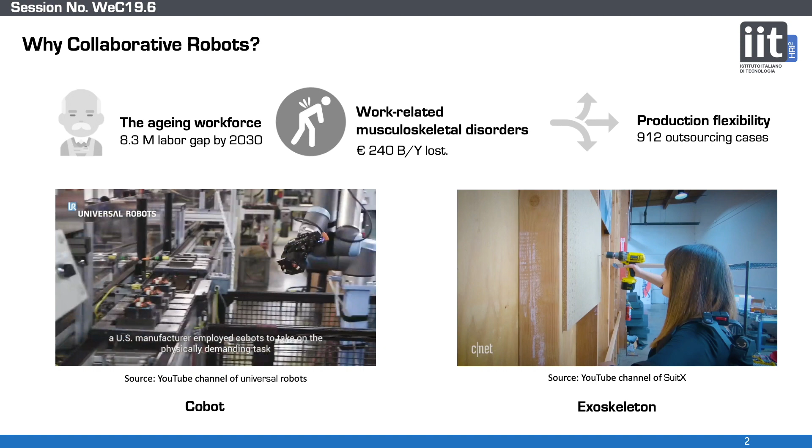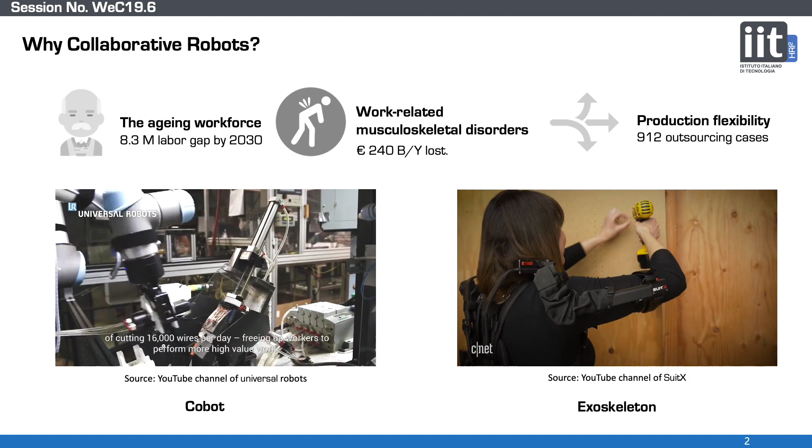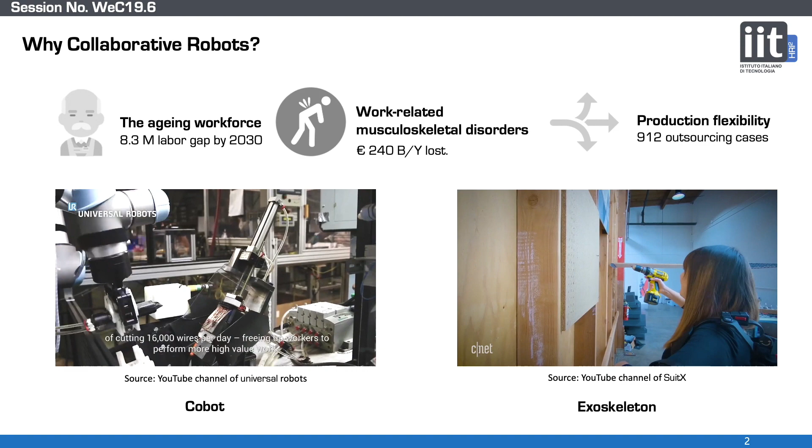Before moving ahead to the main topics, the question is why collaborative robots are important in industry. There are several reasons. First, the working forces in industry are getting aged. Second, companies lose a huge amount of money due to work-related musculoskeletal disorders. Third, production lines demand more flexibility. To address these issues, cobots and exoskeletons are examples of collaborative robots successfully introduced and integrated to take on physically demanding tasks instead of human workers, such as repetitive tasks or load carrying tasks.

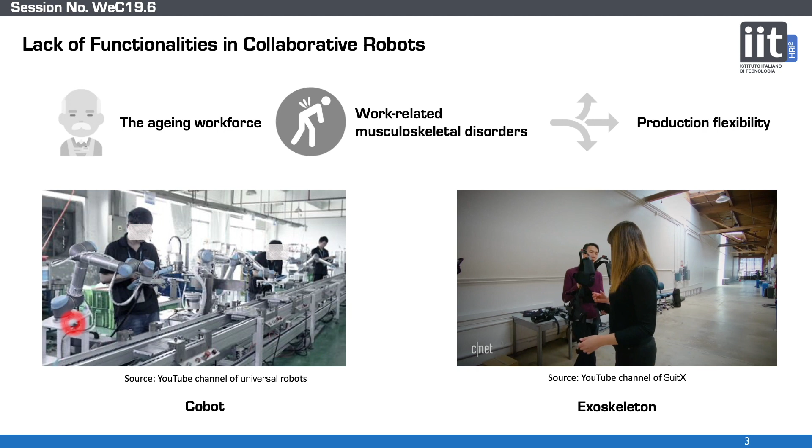Such technology is able to mitigate the workloads of workers. Although the effectiveness of collaborative robots is obvious in helping humans in industry, there still lacks the functionality to move towards future industry in flexible and reconfigurable aspects. Regarding cobots, they are still mostly used on fixed platforms and take on mostly repeated tasks similar to old industrial robots, which means it is hard to adapt them into flexible working environments. On the other hand, the exoskeleton can cause another burden to the wearers when changing their configuration due to the wearing of the equipment, causing fatigue.

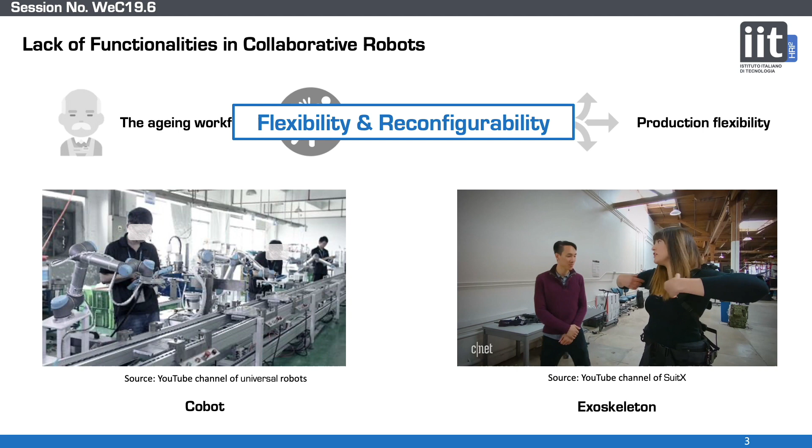To address these issues, we propose a new collaborative framework, a unified system that can be configured quickly between cobots and supernumerary limbs, able to cover a large range of industrial task requirements. This leads to reduced equipment waiting and setup time through exploiting the concept of modularity.

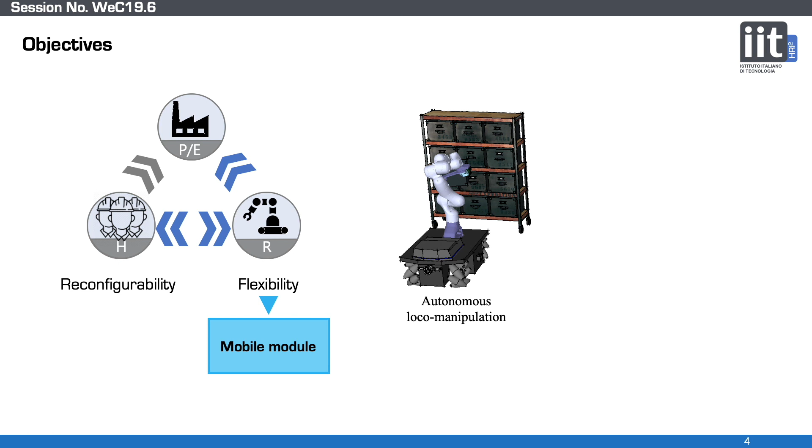To present this topic, the first consideration is flexibility. It can be represented by the mobile module that is able to work in autonomous loco-manipulation. We have developed such a system called MOCA, the Mobile Collaborative Robot Assistant.

The second consideration is reconfigurability. We consider a simple human-robot interface module that will be integrated into such a mobile manipulator. Then it turns into a human-integrated platform to perform joint actions, working like an exoskeleton.

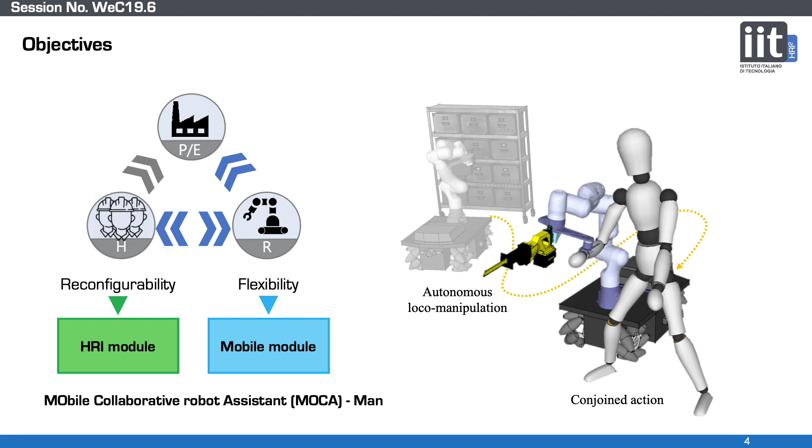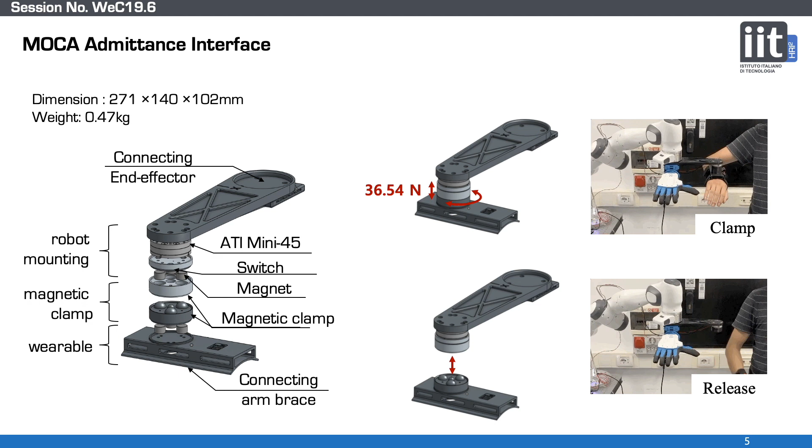When clamped, human intention or interaction forces are transmitted to the robot end effector for use in conjoined action control. In the opposite case, the conjoined action is terminated automatically.

The overall control framework is composed like this. There are two main modes: autonomous and conjoined mode, the latter working like a supernumerary limb. These are distinguished by the switch sensor from the admittance interface, whether it's clamped or not.

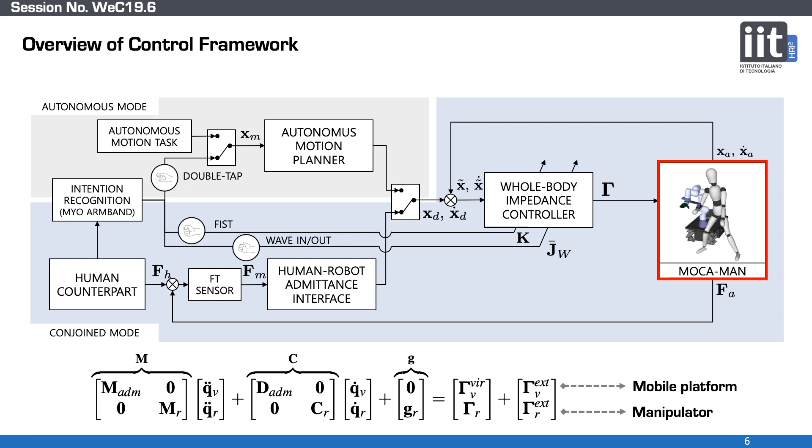To control the MOCA under torque-based control, we construct a whole body dynamic model that includes the mobile platform and the manipulator. As mentioned earlier, the MOCA has been developed for agile mobility. It is composed of the Robotnik mobile platform, with the Franka arm and Pisa/IIT SoftHand end effector placed on top for grasping purposes.

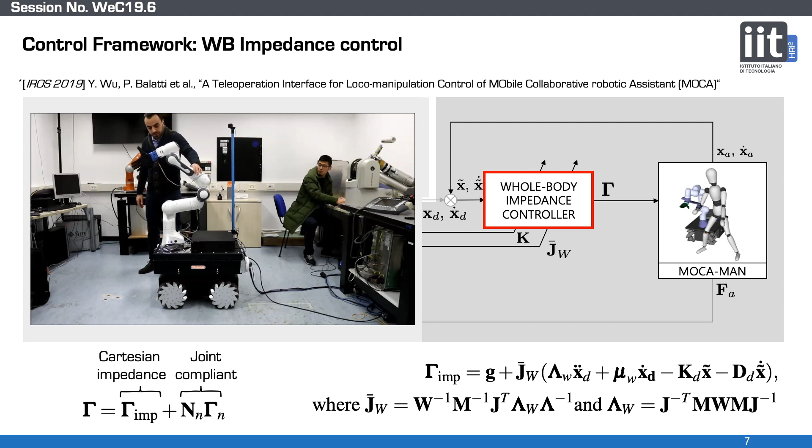The whole body motion is controlled through the whole body impedance controller as well as joint compliant control in the projected null space. The desired impedance parameters, compliance, and damping in Cartesian space can be regulated based on the targeted task. For more details, you can find the related paper presented at IROS 2019.

Moreover, we extended this whole body impedance control idea with the weighted Jacobian method. Thanks to this method, we are able to handle prioritized motions either in the mobile platform or the manipulator while controlling the whole body motion.

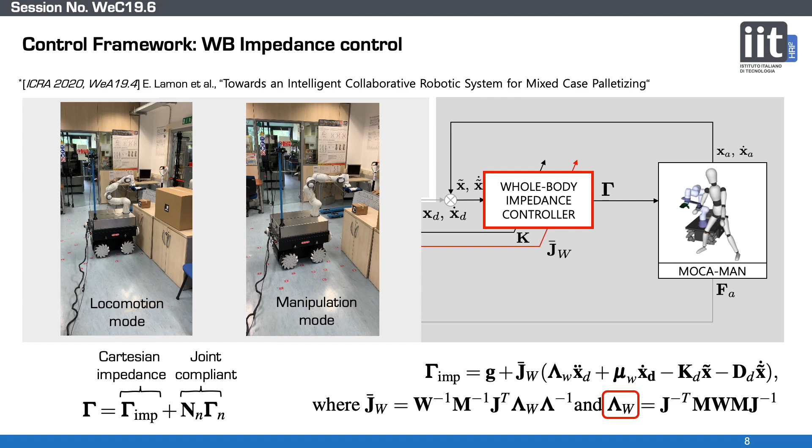This video shows that when higher weights are used in locomotion, most of the actions are exploited in the mobile platform than the manipulator. In the same targeted control, on the other hand, when the weight is on the manipulator side, the manipulator has more prioritized actions than the mobile platform to reach the same target. This work will also be presented in another session by colleagues.

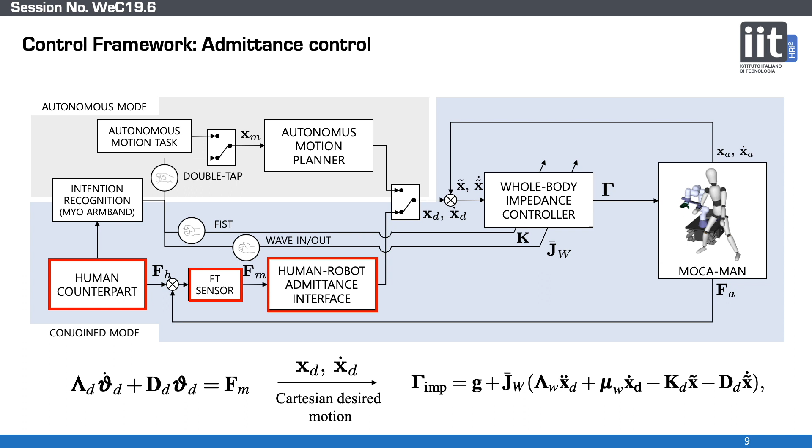When the admittance interface is clamped, the human intends to work with the MOCA, so the conjoined mode is activated. The target admittance action is to minimize interaction forces to follow the human's motion. The admittance controller generates the desired motion as input to the whole body impedance controller, using the measured force from the force torque sensor at the admittance interface.

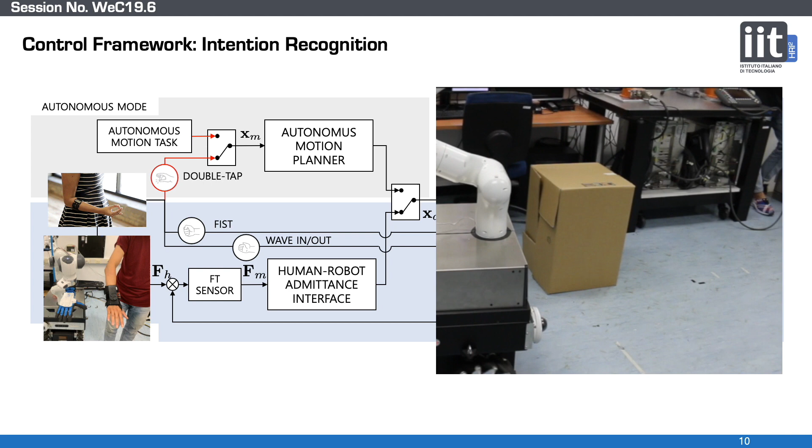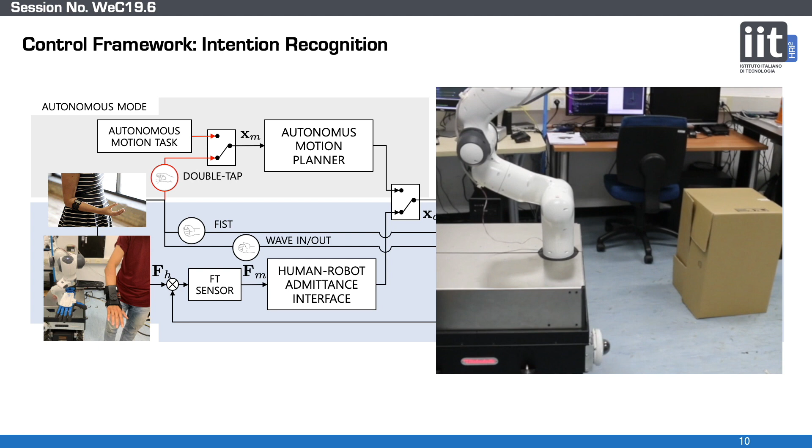To switch the mode and adjust the control parameters, the framework includes human gesture detection techniques through the Myo armband. Before clamping the interface, the double tap gesture will call the MOCA. The MOCA will approach you at the targeted position, with motion controlled based on the autonomous mode planner, including self-navigation. The fist gesture is engaged with the soft hand control to grasp or release the object.

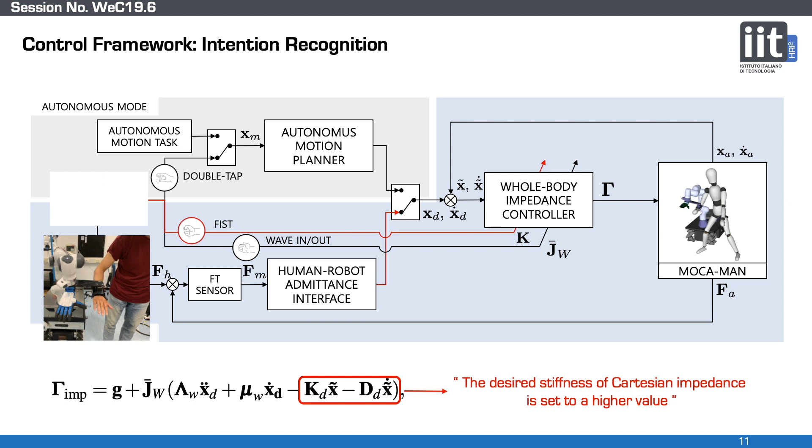When the soft hand is closed, it's pretending that an external object is being held, so the stiffness parameters of the impedance controller are automatically set to a higher value. Then the MOCA is able to compensate the weight or the external forces at the end effector.

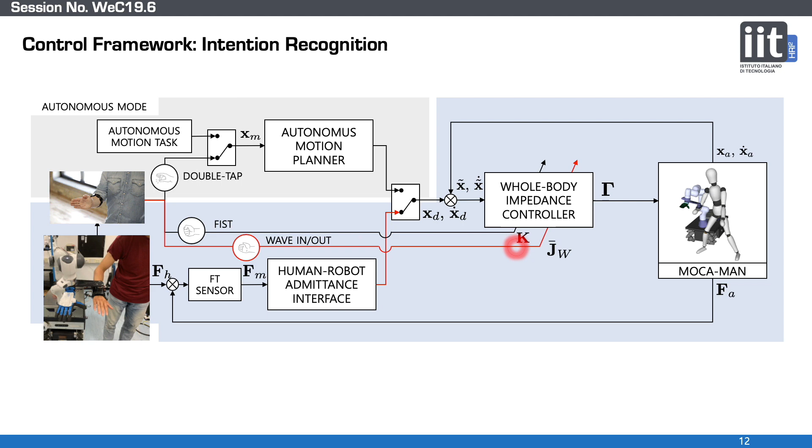The last gesture, a wave motion, is employed to switch the prioritized motion between the mobile platform and the manipulator during the task when needed.

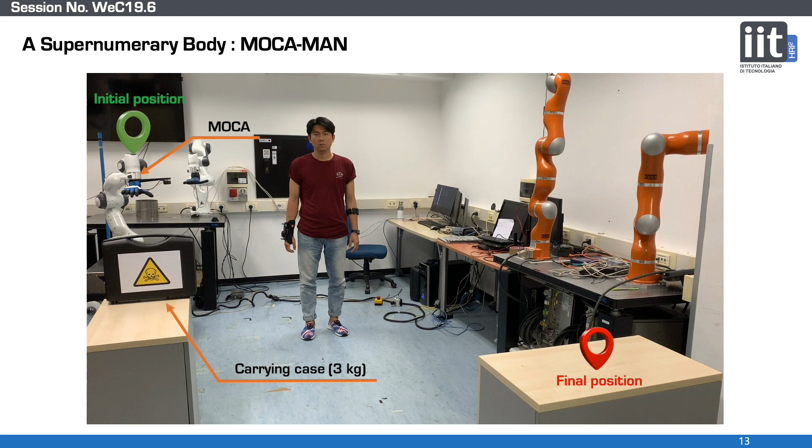To validate our approach, the experimental setup is presented here. We simulate a typical industrial task of carrying an object far away.

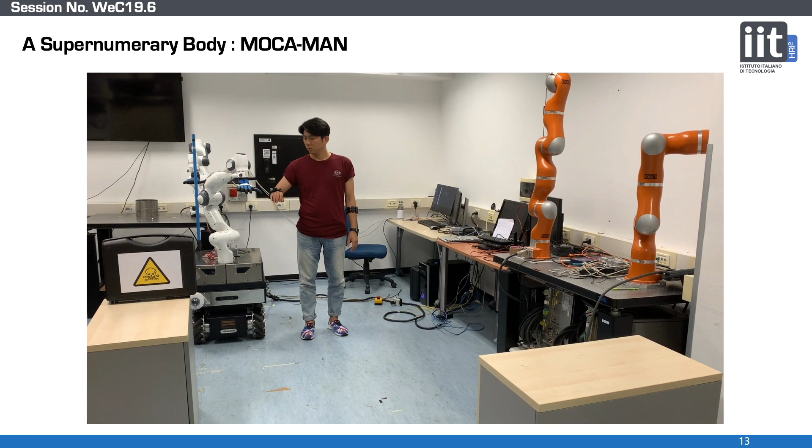Through the double tap gesture, the MOCA starts moving towards the subject, and then the subject clamps to the interface. Then the conjoined action is started, now working as the supernumerary limb of the human.

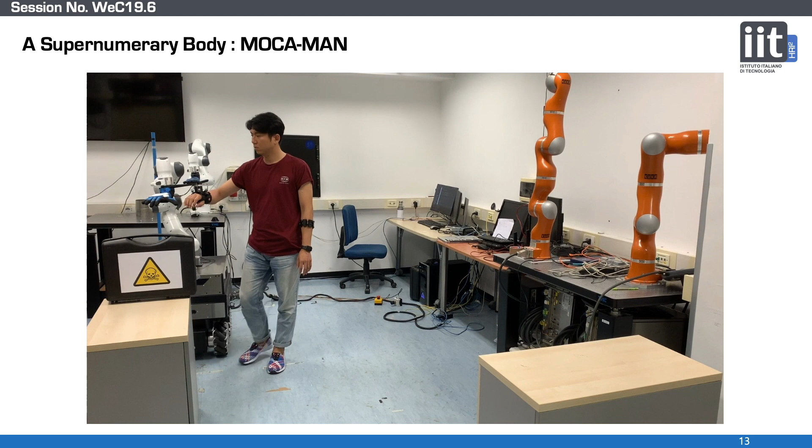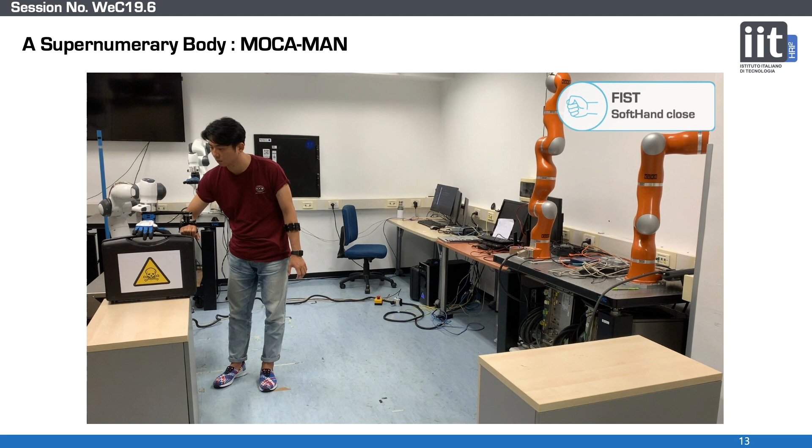After a few steps of locomotion, the subject needs to grasp the object with precise control, so the mode is changed into the manipulation mode. Then the subject is able to handle it easily to grasp it.

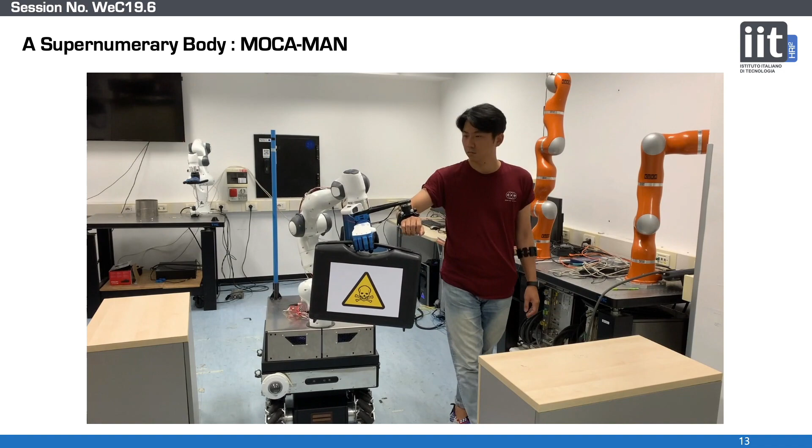To move to the final position at a far distance, the mode is changed again to the locomotion mode, and then moves towards finishing the task.

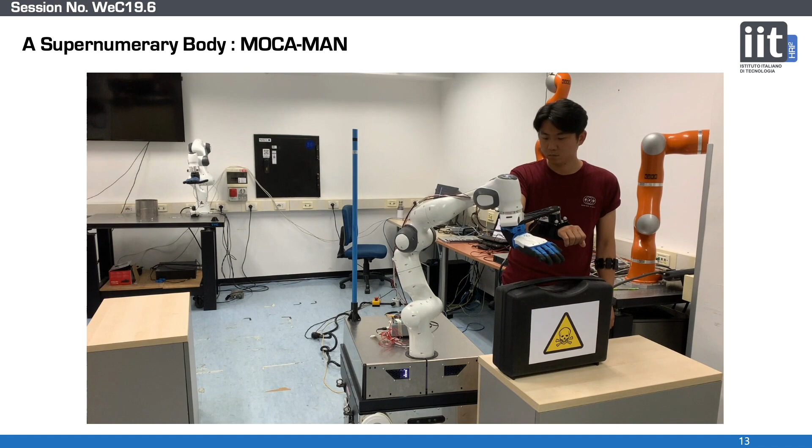The task is clearly to move the object. The subject finishes the task and can easily release the interface, and then the conjoined action is terminated.

The results show promising effectiveness. The first and second rows present the position of the Franka and the Robotnik, changing their prioritized motion through gesture recognition. The major motions are switched between manipulation and locomotion.

In the meantime, the overall interaction forces while carrying a 3 kilogram object are evaluated. This means the entire control framework can physically support the subject without working against the human's motion.

The detachment force of the magnetic clamp interface is measured when it was released. It was around 39 newtons. This value is consistent with the safety considerations we took into account when designing the magnetic interface.

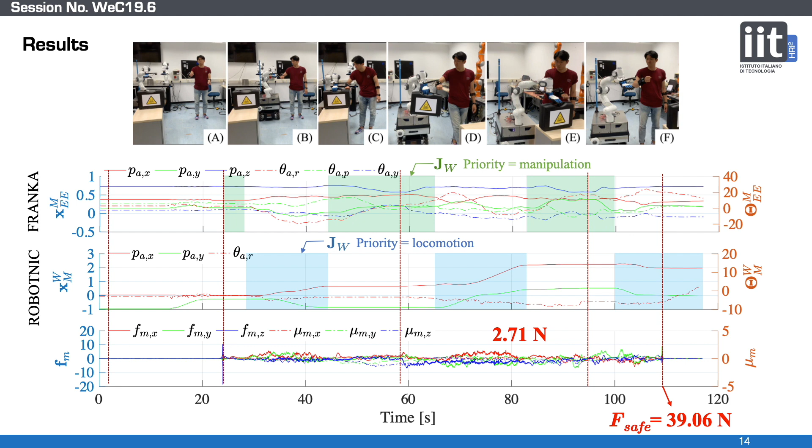To validate more details on the effectiveness of the physical support, we performed a separate experiment to measure muscle activity while performing a drilling task. We compared the muscle activities with and without support from the MOCA-MAN.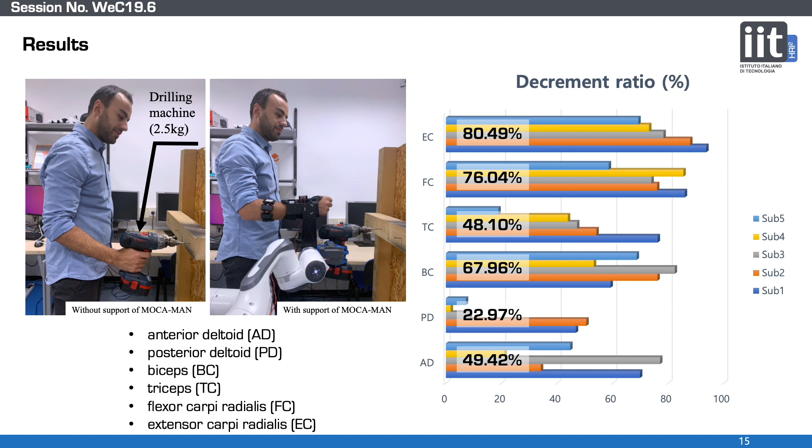To conclude, we present a novel collaborative framework that incorporates the advantages of collaborative robots and supernumerary limbs. The framework aims at high flexibility and reconfigurability. This was achieved by integrating an admittance interface into the mobile manipulator, known as MOCA.

We expect that MOCA-MAN provides more solid evidence of coherent reduction in the effort of human partners in realistic human-robot collaboration tasks.